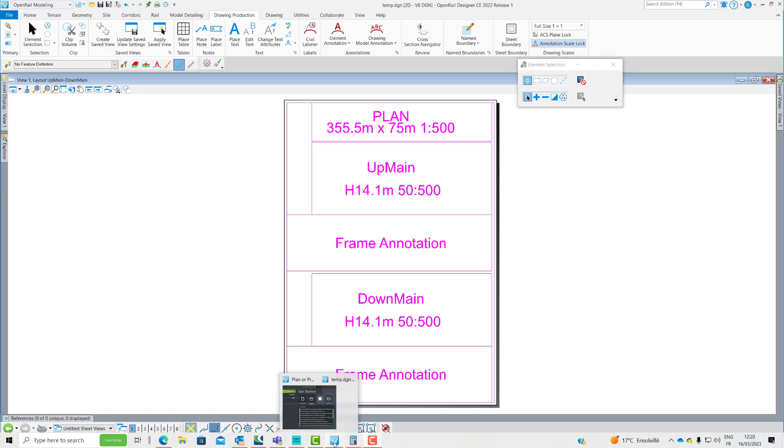So just like UpMain, DownMain. So create the sheet seed as I'm starting here and how to use it. So the creation of sheet seed is really the same workflow as usual. So create the plan and create profile from the plan.

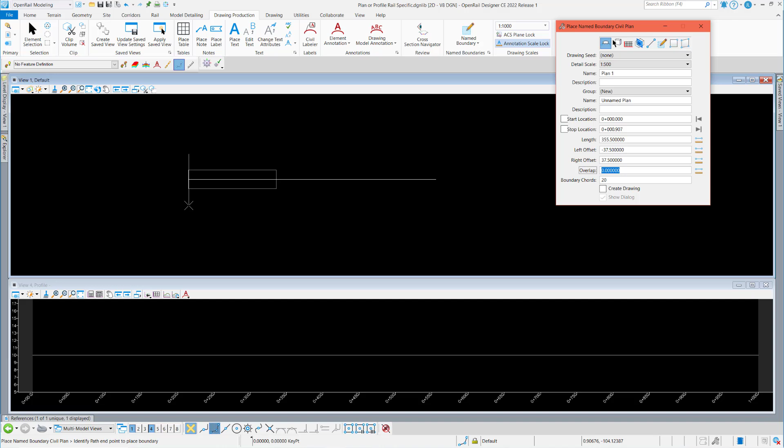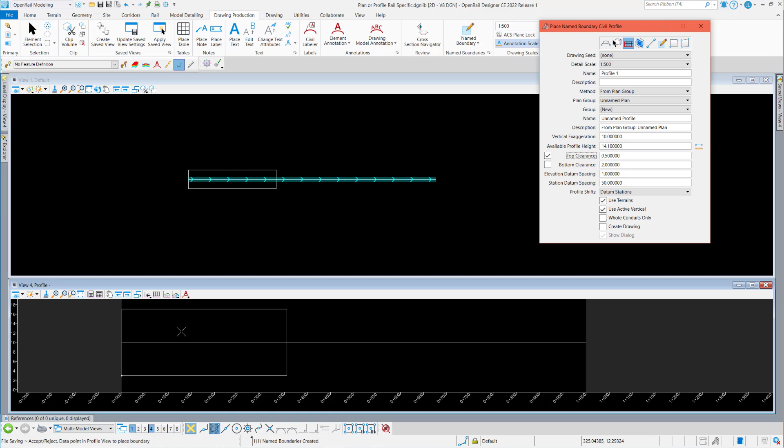So based on the layout I want to achieve, I get some measurements and I can set all parameters here. For example, here the available profile height to 14.1. So then create the sheet, and again, nothing new here. You can find a lot of content about how to create sheet seeds.

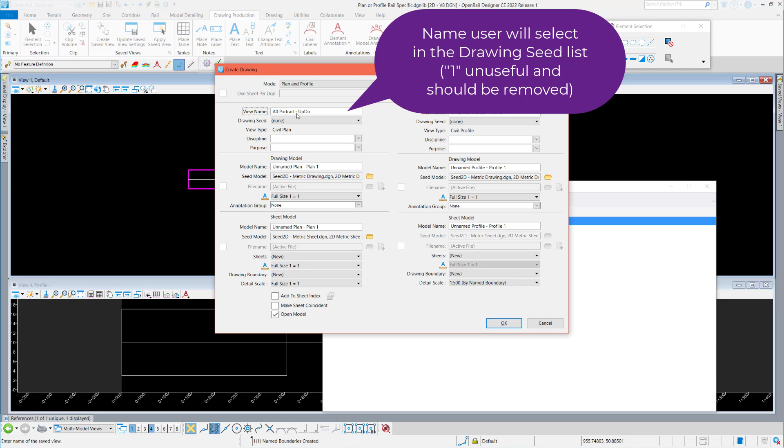Naming, here's the one the user will see in the list of drawing seeds. So you can name it as you want. And do it for plan and profile. So I put everything in the same sheet.

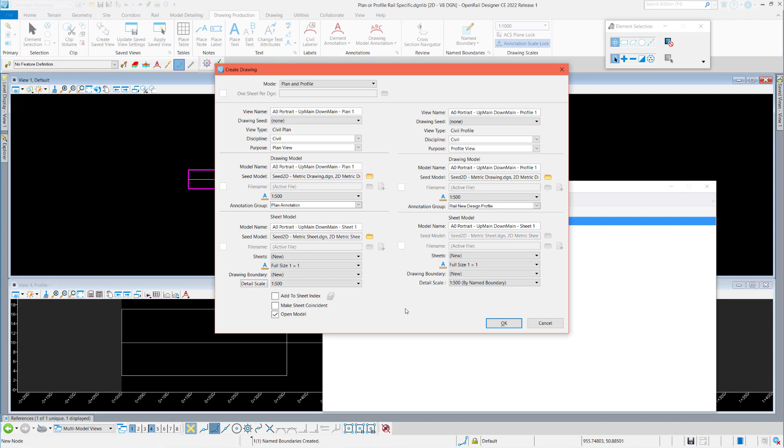And you can add some annotation if you want to. Be careful of the scale everywhere. And then hit OK. And then we've got the sheet. Now we must prepare with the good layout. So I want an A0 portrait. So I don't have it in the list. I can just type custom.

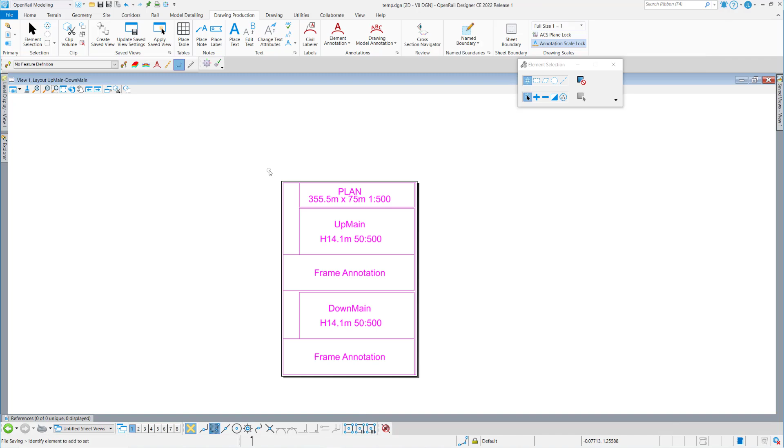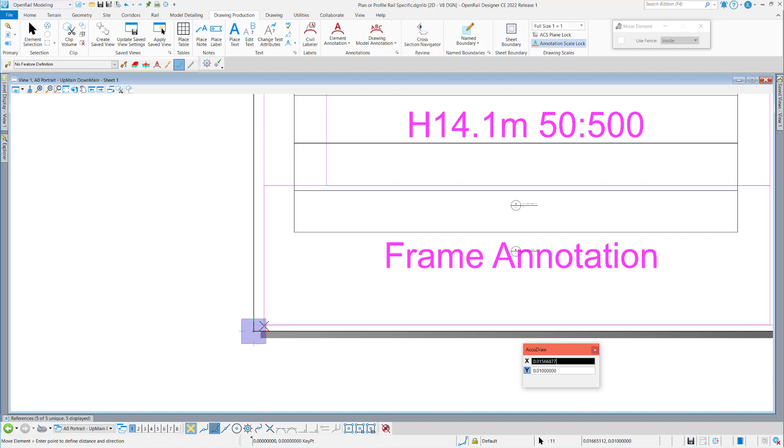I would get the layout from my preparation here. So just a copy paste in the sheet. It's just to help the design and the layout. Okay, just put it here. And now I must move my references here at the good location.

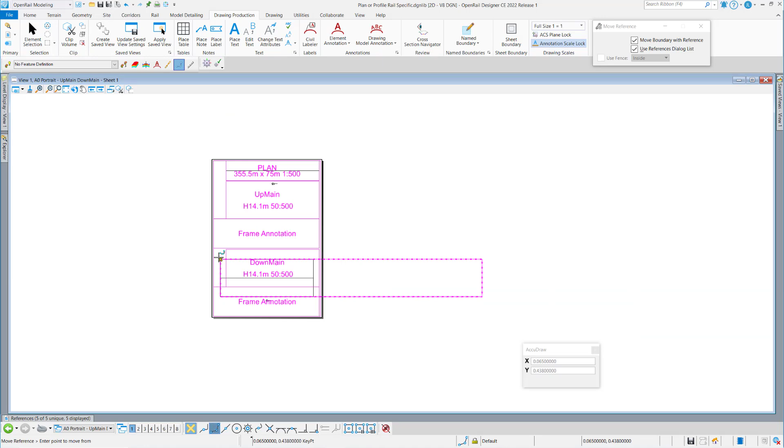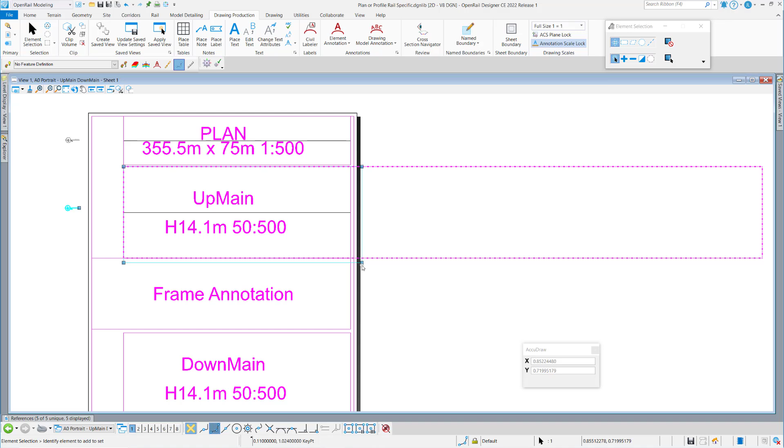So move the plan on the top and move the profile, the up main in this case, here on the good location. Then adjust the detailing symbol and the frame. Must match the reference here. On the frame in which you want the reference to be clipped.

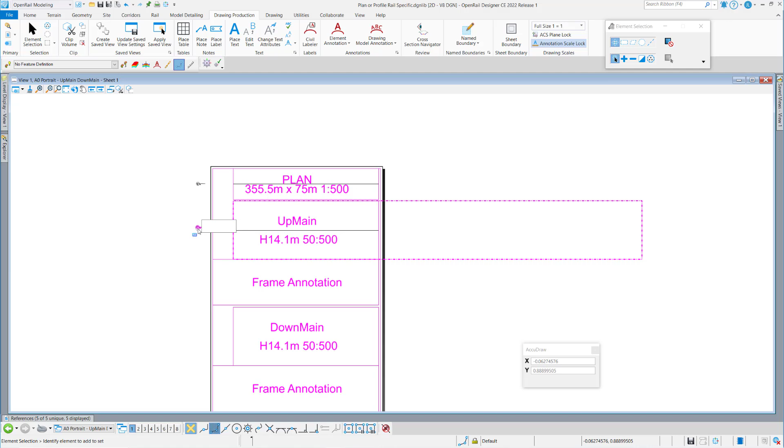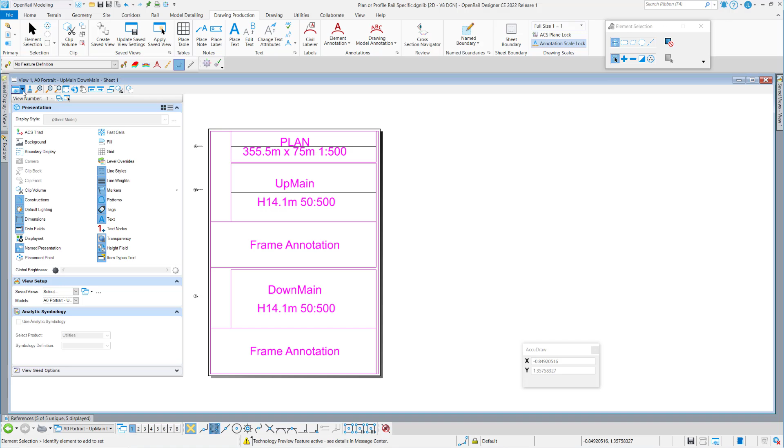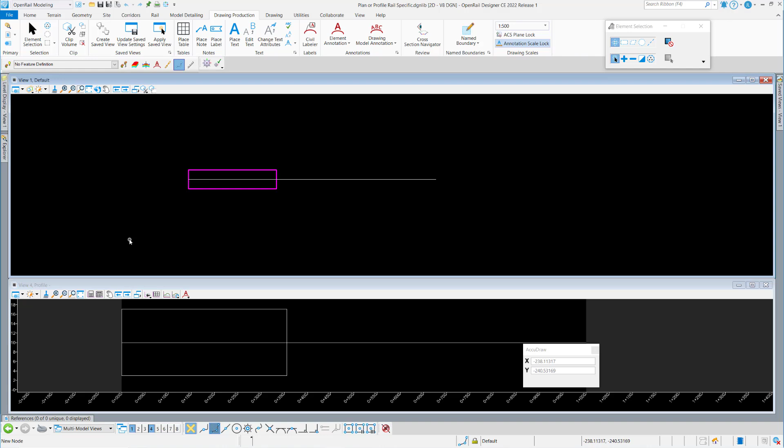So then you prepare your models as usual. Try to keep everything clean. Remove the ACS if needed. Just zoom. And don't forget to clean the file from any annotation groups or annotation definitions, and also element templates, just to not duplicate in DGN libs.

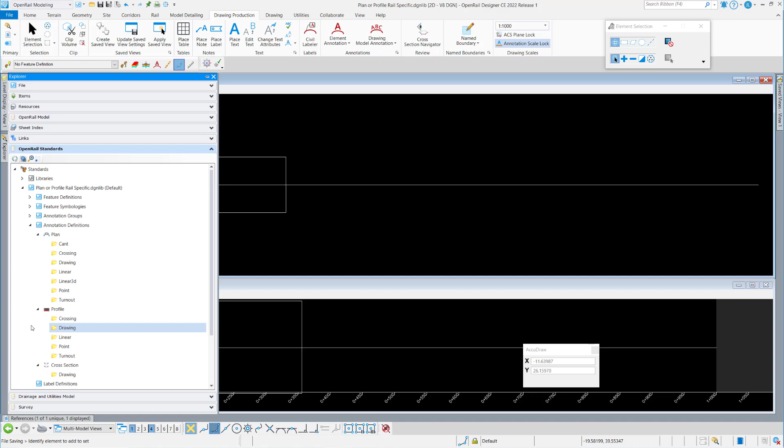That's good for the annotation. Just check the element templates and none has been copied here. Okay, so now I can move to my design file where I will use this one. So just reload the file using this shortcut rd= to be sure the DGN lib is reloaded.

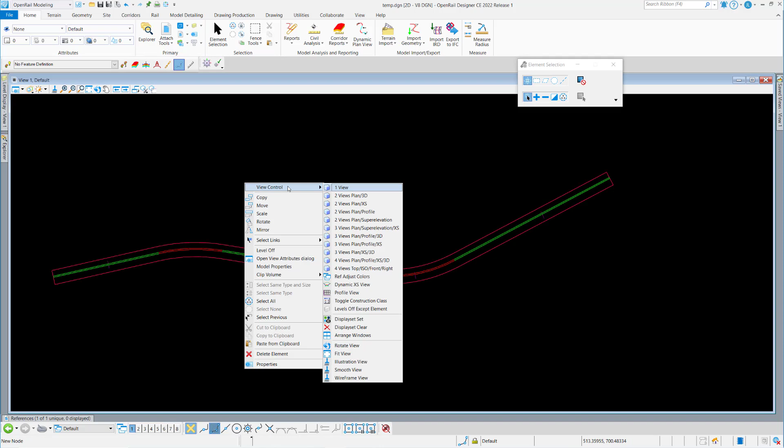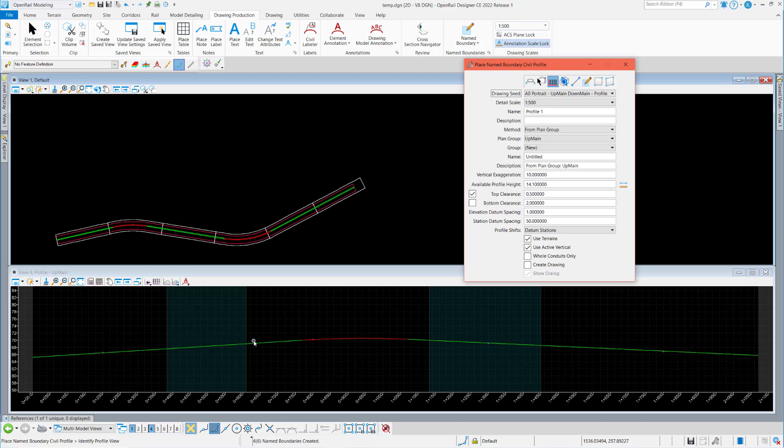And I start my usual workflow, creating sheets. So using named boundaries, I need the plan and profile, of course, and you can see now that I can pick from my list and place my named boundaries. The same for the profile, except that I'm using the one from the plan group. And click. All the parameters are fine.

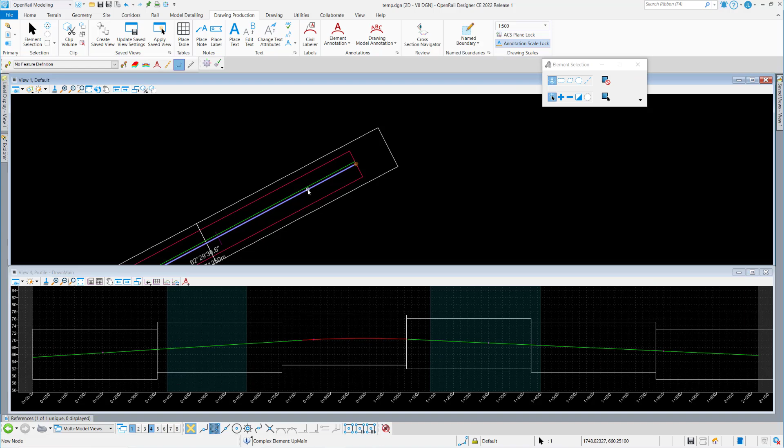I can go on. I will prepare now from my down main the same. So display the profile and use the same plan group to have both synchronized to the same location. Now I can create the sheets. So I will start by creating the plan profile sheets using the up main.

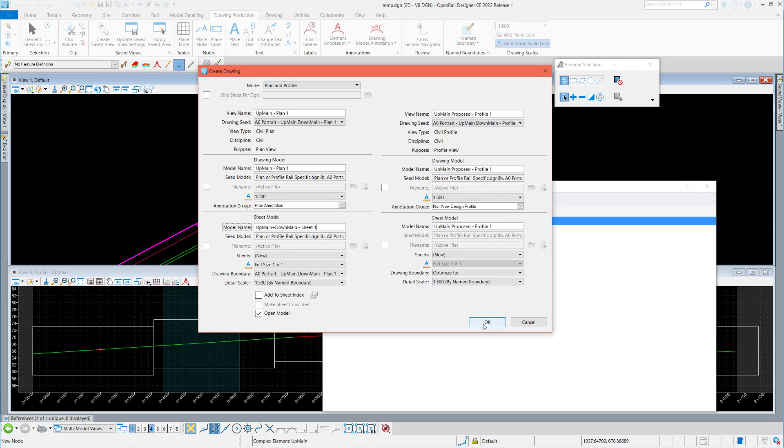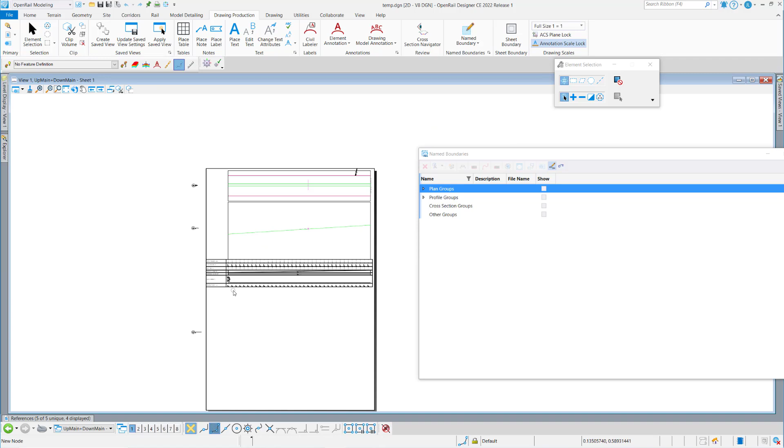Here I can rename my sheet model. Everything is okay. And it's creating all the sheets, in this case 6 sheets. And you can see the layout for the first one. Didn't use the same annotation group, but I will fix this later. So I don't have any margin on the left that we can see. Just a little detail. But I have all my sheets with plan and up main profile.

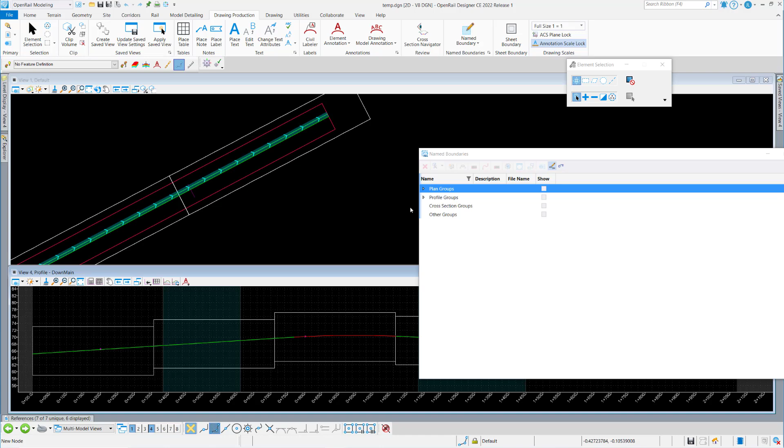So now I must add the down main profile. So to do that, I will just create my profile, but add these to the existing sheet. So you must do it one by one and use the third slot available. So again, I can see now it's nicely laid out on my sheet, and I can go on to my second one, create profile, pick my existing sheet, my slot, and do that for all 6 sheets.

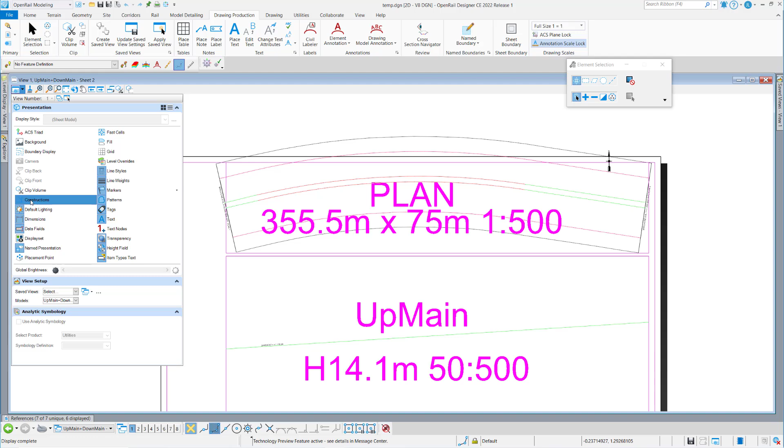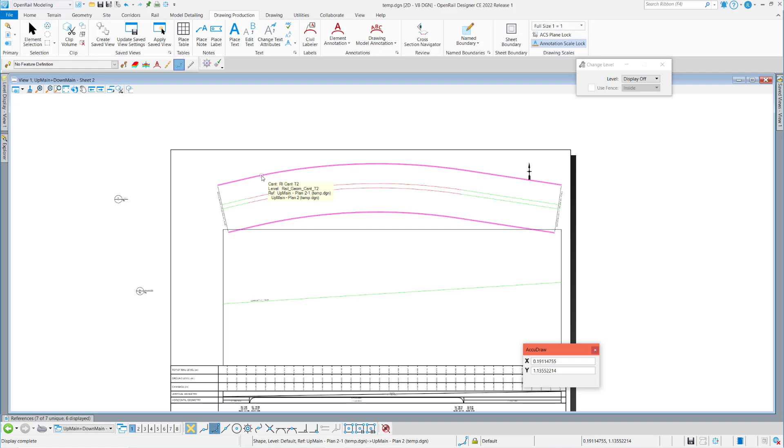And that's it. I've got my layout, and you can always refine the layout, moving any of the references. So be careful to keep them aligned. Just moving up, down maybe. And I have some indicators on my layout to check how well aligned they are. We'll just see this in a second. Here, my little magenta line, and the point of intersection on each of the profiles to check everything is well aligned. As much as possible, of course.

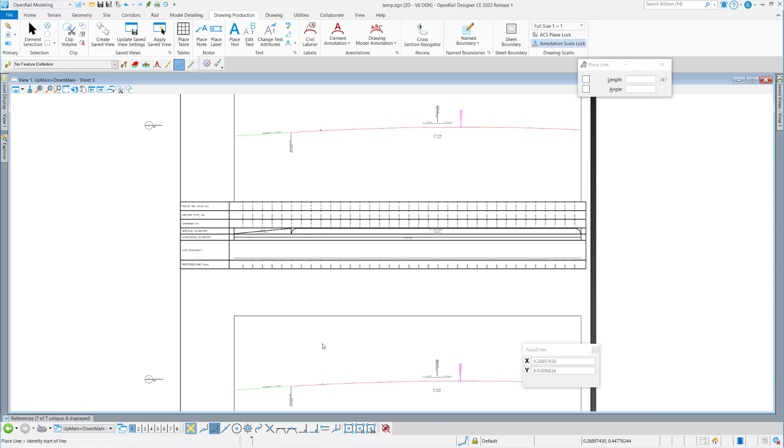Now I will just use the annotation group I used to prepare my layout and define the margins and the space below the profile. This is for the renewal. And that's it. You've got all the profiles and the plan.